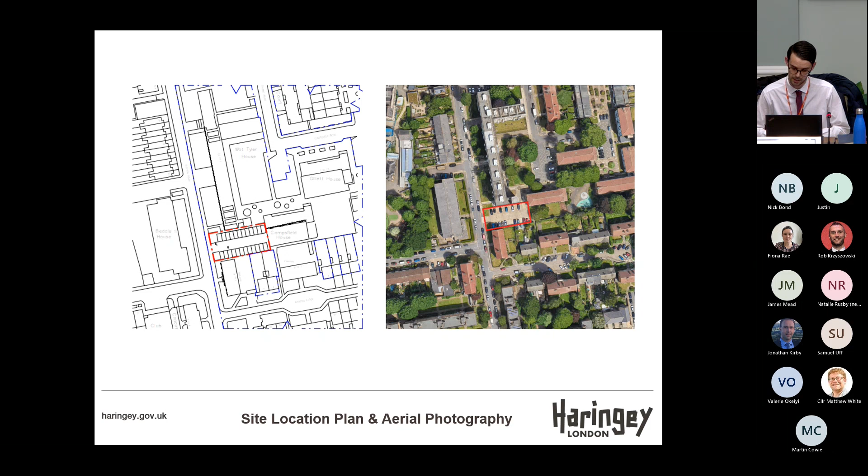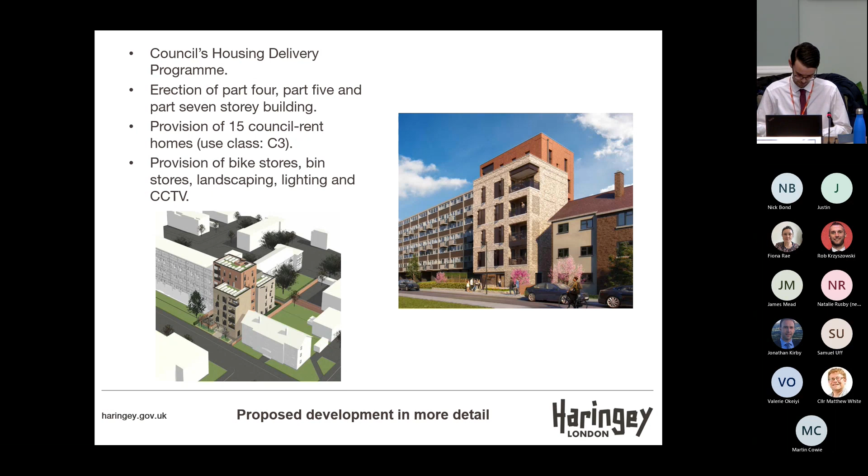The scheme also proposes off-site works on other parts of the estate, including new landscaping, new tree planting, improvement to existing play spaces, and provision of new lighting and CCTV. These works would mainly take place on the areas identified as B, C and D on the plan on the right-hand side.

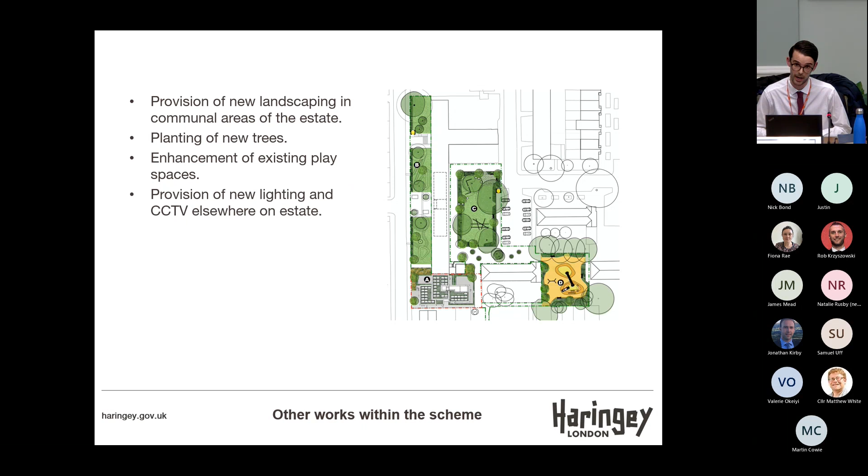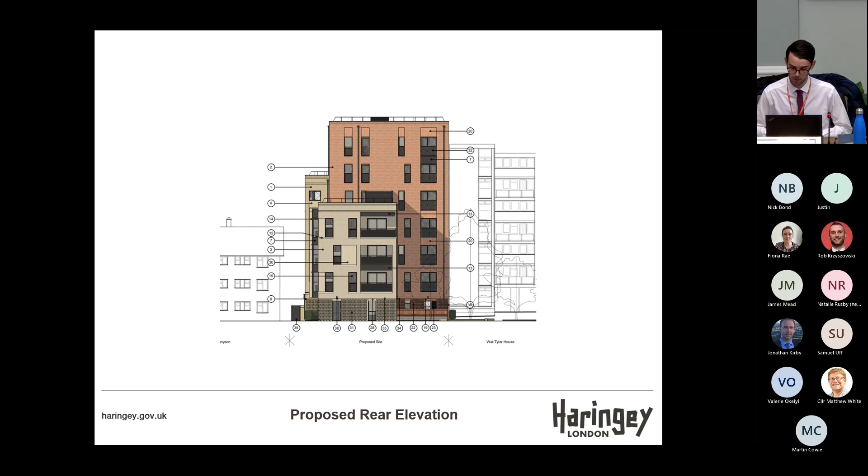These are 2 of the proposed floor plans. The image at the top is the proposed ground floor plan, which shows 2 dwellings provided at ground floor, one of which would be a wheelchair accessible dwelling. You can see there is a central staircase that provides access to the upper floors. The bike and bin stores are also provided at ground floor level, shown in purple on that image. The bottom image is a proposed floor plan showing how the dwellings are split up at upper floor levels.

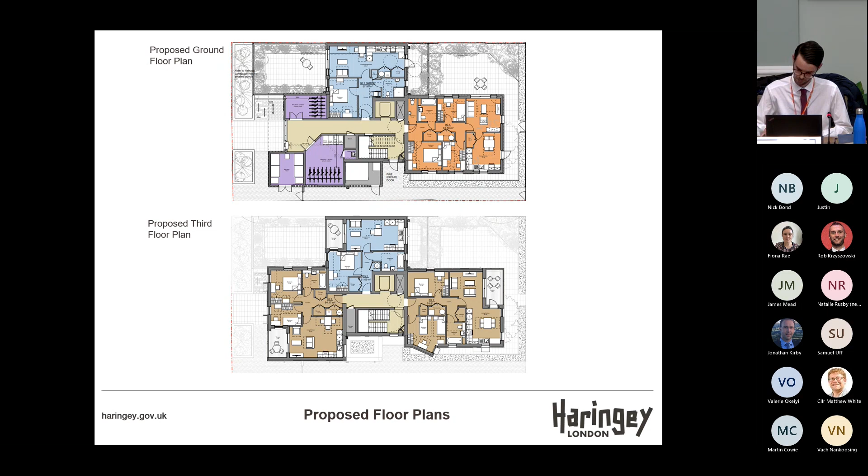Turning to the principle of development, the scheme would provide 15 homes contributing towards the council's housing targets. The scheme would be 100% affordable, addressing local need and need across London for affordable housing. The scheme would make effective use of a brownfield site in an established residential area where residential uses are supported in principle. Overall, officers support the principle of the scheme.

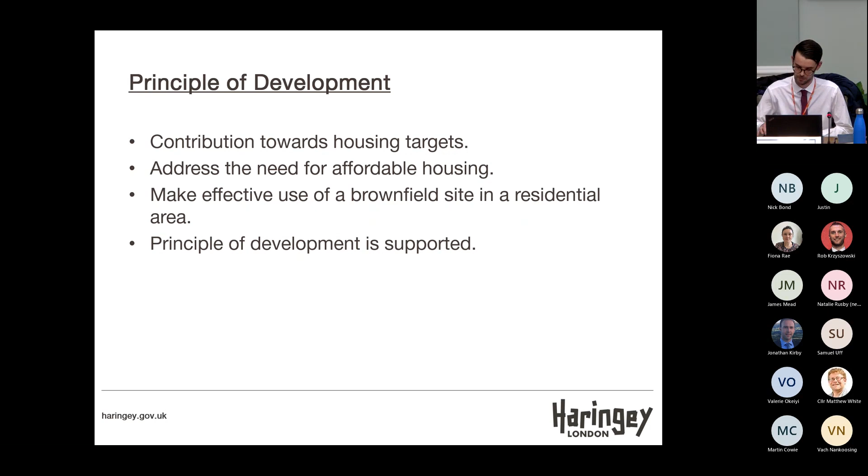The scheme has been through the council's pre-application process. The image on the left-hand side shows the initial pre-application proposal. The image in the centre shows the proposal that was presented to the Quality Review Panel. The response from the Quality Review Panel was broadly positive, however some design and detailing refinements were suggested by the QRP. The image on the right-hand side shows the final planning application proposal.

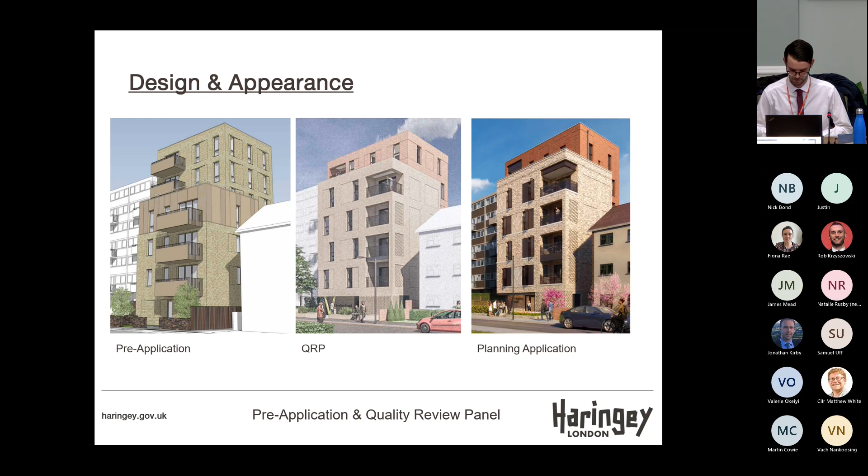The projection above Wat Tyler, however, is not significant, and the bulk of the building has been broken up by using different heights across it. Therefore, it's considered that the development sits well in relation to Wat Tyler and the wider area. The proportions of development are considered acceptable.

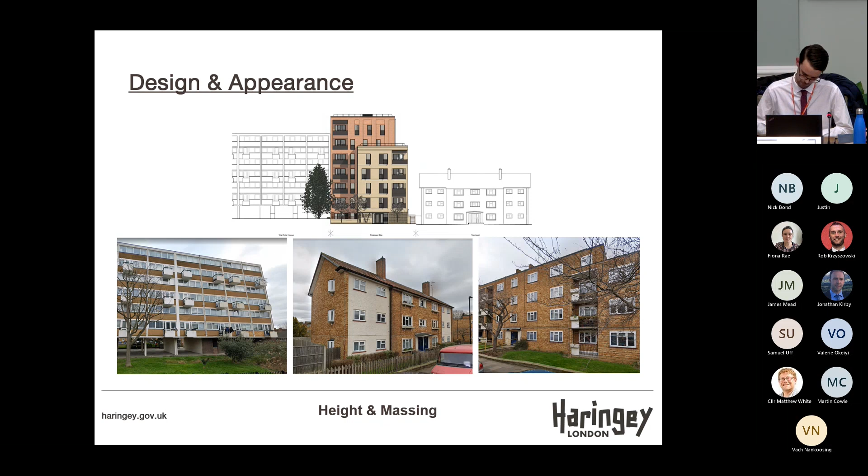The main material used for the proposed development is brickwork, and this is considered acceptable as this material is characteristic of the area. Three different types of brickwork are proposed across the development, with yellow stock to the front, red brick for the central block, and a lighter coloured brick to the rear. The use of three different bricks helps to break up the appearance of the development.

Metal windows and doors are proposed to be incorporated across the development, and these add a contemporary element to the scheme. At ground floor level, it's proposed to construct a wide recessed entrance, which gives a clear frontage to the building. Hit and miss brickwork is also proposed to the side of the entrance, providing a strong visual base to the building. These aspects ensure that the development appropriately addresses the street.

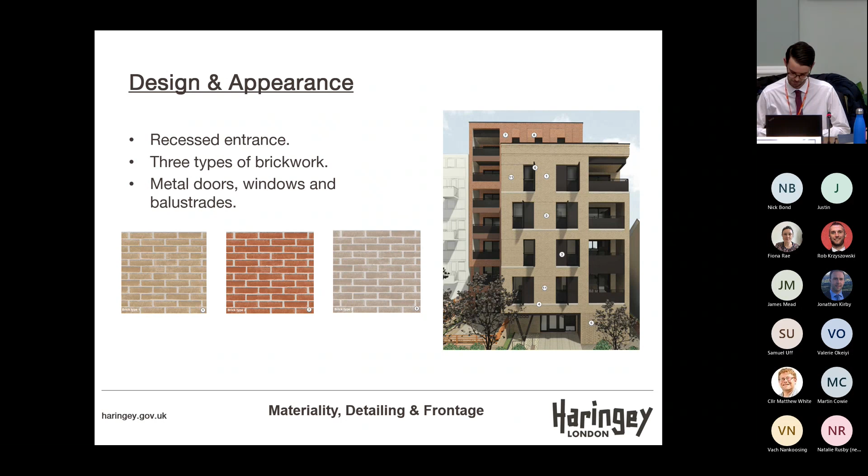The site is not within a conservation area. However, there are four conservation areas in the proximity of the site. To the west is the Campsbourne Cottage Conservation Area. To the north is the Alexandra Palace and Park Conservation Area. To the east is the Hornsey Waterworks Conservation Area. And to the south is the Hornsey High Street Conservation Area.

The top photo shows a view from the Campsbourne Cottage Conservation Area. From this view, the development would be viewed together with Wat Tyler House, so would not be overly dominant in this setting. The bottom photo shows a view from Alexandra Park. In this view, the development would blend into the backdrop of other buildings. The development would not be highly visible from the other two conservation areas. Overall, it's considered that the setting of the nearby conservation areas would be preserved.

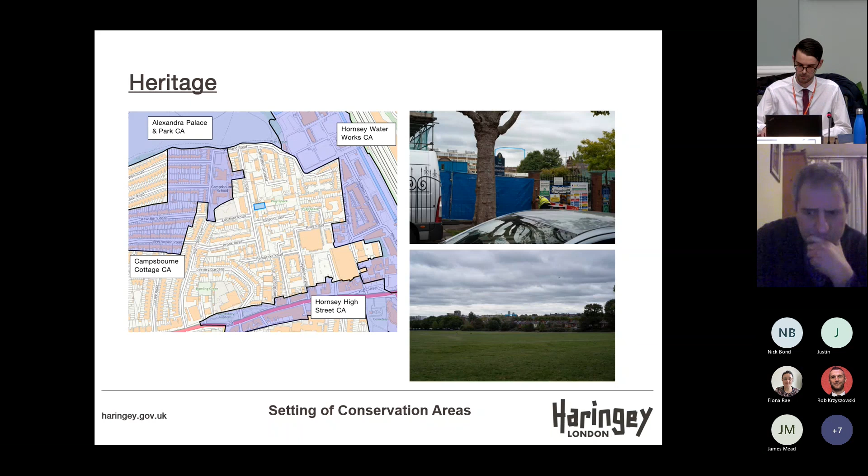In terms of neighbour amenity, Wat Tyler House is the building to the north of the site. The 7-storey element would be constructed close to the boundary with Wat Tyler House. However, this element would not project forward of the front wall of Wat Tyler House and would not project beyond the main rear wall of Wat Tyler House. The 4 and 5-storey elements would be set in from the boundary with Wat Tyler House. The overall siting would limit impacts on outlook and open aspects from this neighbouring building.

A daylight and sunlight report has been provided with this application, and this concludes that sunlight and overshadowing tests would be passed for Wat Tyler House, and the majority of windows would pass the daylight test. The scheme has been designed to ensure there would not be undue overlooking of Wat Tyler House.

To the south of the site is Tennyson House. The 5-storey element at the front would be constructed close to the boundary with Tennyson House, however would not project forward of the front wall of this neighbouring building. The other parts of the building would be set in from the boundary and would drop down to 4 storeys to the rear. These factors would ensure that there would not be undue impacts on outlook and open aspects.

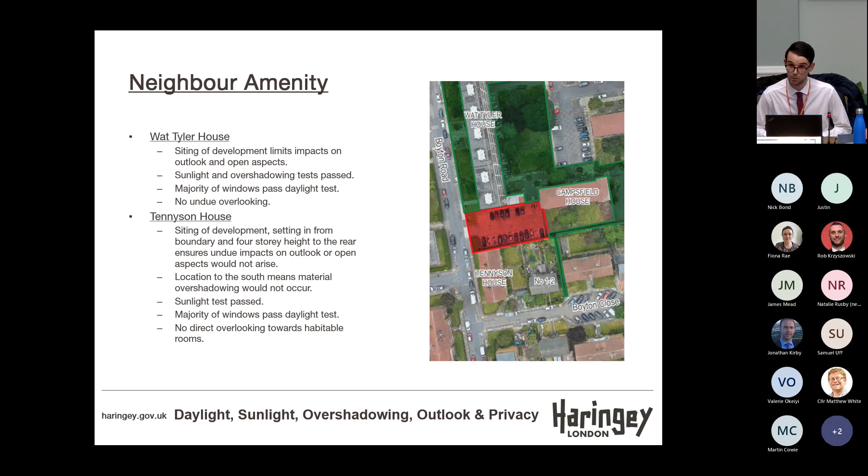The location of Tennyson House to the south means that material overshadowing would not occur, and the daylight and sunlight report has concluded that the sunlight test has been passed for Tennyson House, and the majority of windows at Tennyson House passed the daylight test. There would be no direct overlooking towards habitable rooms.

To the east of the site and to the rear is Campsfield House. The development would be suitably separated from Campsfield House to ensure there would not be undue impacts on outlook or open aspects. The daylight and sunlight tests have been passed for Campsfield House. There would not be any direct overlooking towards the windows and habitable rooms of Campsfield House.

To the southeast of the site is 1 and 2 Boyton Close and Fleming House. Again, the development would be suitably separated from these neighbours to ensure material impacts on outlook and open aspects would not occur. The location of these buildings to the southeast means that overshadowing and loss of sunlight would not be excessive. The majority of windows tested at these neighbouring properties pass the daylight test. The development would incorporate a number of southern-facing windows. However, the fitting of obscure glazing in these windows can ensure that overlooking would not be significant.

The scheme has been designed to comply with the London Plan space standards. All of the dwellings provided would have access to open space, outdoor spaces, with the ground floor units having access to garden areas and the upper floor units having access to balconies and terraces. All of the dwellings provided would be dual aspect.

There would be some non-compliance with the daylight and sunlight tests for the new units. However, this is mainly due to the provision of balconies above the new windows. If the balconies were removed, daylight and sunlight results would be significantly improved. Officers consider that the provision of outdoor spaces in the balconies is important. Therefore, the provision of these outdoor spaces is considered to outweigh any non-compliance with the daylight and sunlight tests. Therefore, acceptable living conditions and good quality accommodation would be provided.

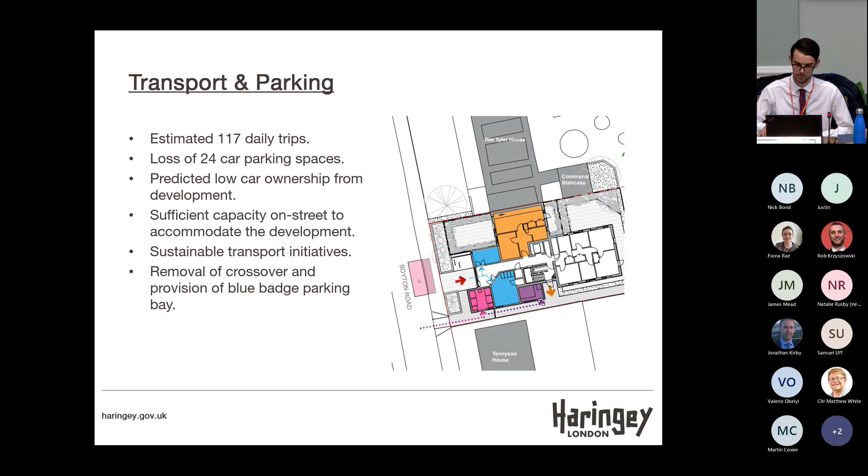In terms of sustainability and energy, the scheme would achieve a 76% reduction in carbon emissions, mainly through energy efficient measures and renewable technologies such as air source heat pumps and photovoltaic panels. A carbon offset contribution would be required, and the scheme would pass the overheating requirements.

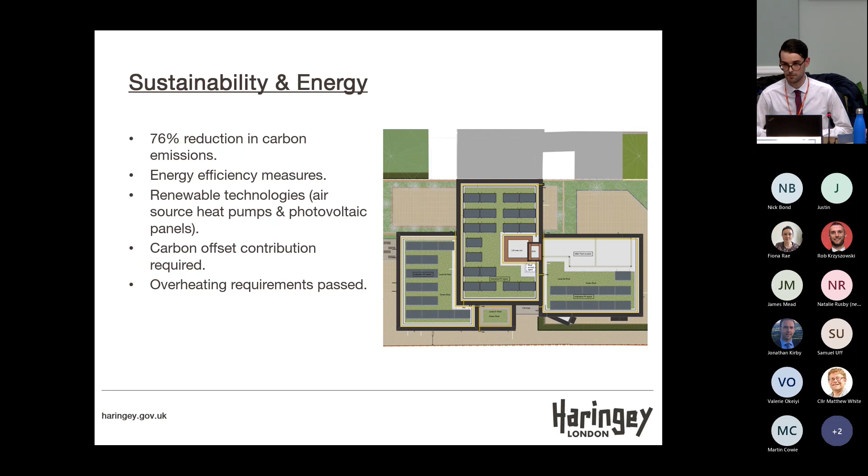As already mentioned, the scheme includes landscaping works on site and off site. Shrub and hedge planting is proposed on the areas labelled A, the site, area B, the area to the front of Wat Tyler House, area C, the communal garden area to the rear of Wat Tyler House, and area D, the play space adjacent to Campsfield House.

The planting of new trees is proposed across all these areas, with a net gain of 15 trees in total. The proposed development would incorporate green roofs, contributing to the greening of the area. Overall, the scheme would deliver an urban greening factor of 1.73 on this part of the estate, with a net gain in biodiversity.

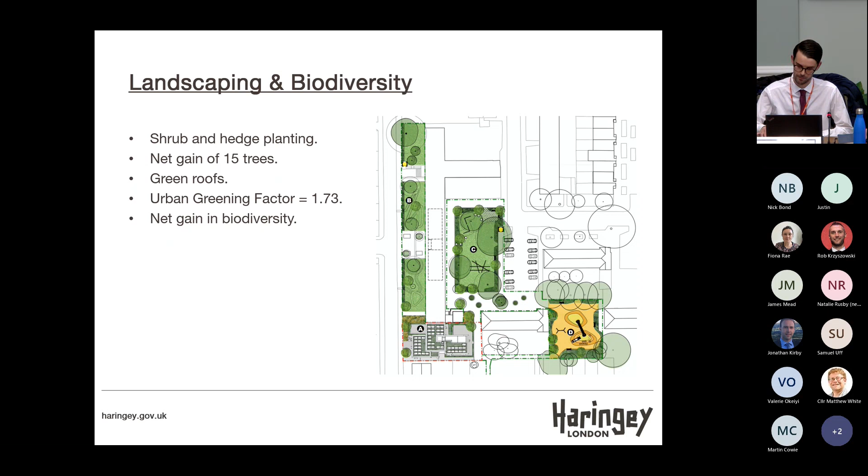The applicant has worked with the Designing Out Crime Officer, who has no objection to the scheme. The scheme includes a number of crime mitigation measures on-site and off-site, including new lighting, new CCTV and defensible boundaries. The scheme would also deliver increased passive surveillance, particularly over the alleyway to the rear and the garden areas to the rear.

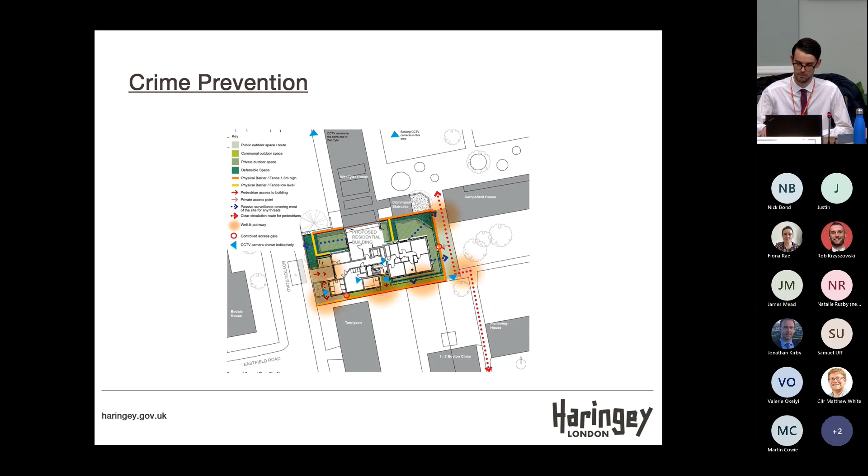In terms of fire safety, the proposed building would be greater than 18 metres in height and therefore would be a relevant building for fire safety purposes. This means that a fire statement is required.

A fire statement has been provided in support of this application, and this makes various recommendations on the construction of the building, the features required to reduce fire risk, and the means of escape and access for the fire service. These recommendations can be secured via a condition.

There has been a recent debate regarding the number of staircases required in taller buildings. The GLA has recently confirmed the position in London, and 2 staircases are required in buildings over 30 metres in height. This building is under 30 metres in height, and therefore 1 staircase is considered acceptable in this instance.

The comments from the Health and Safety Executive are noted. However, officers consider that ground floor escape routes are acceptable, and neither the fire brigade nor the council's building control have raised any concerns with the development. Therefore, the development is considered acceptable in respect of fire safety.

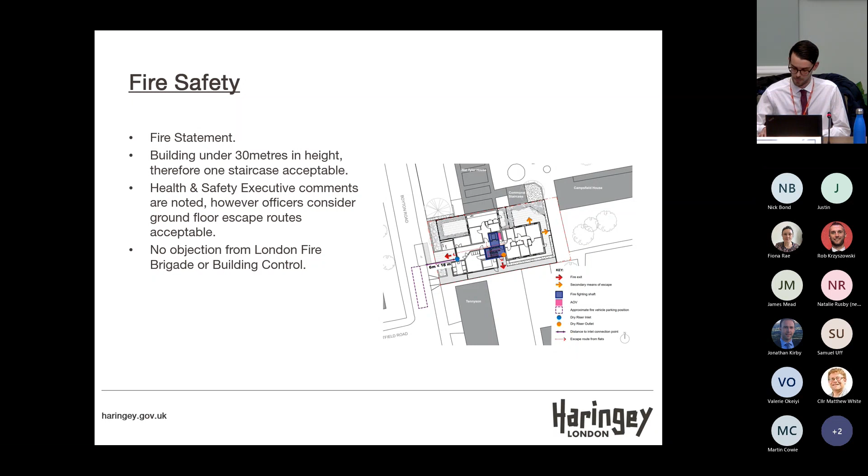To conclude on the scheme, the principle of development is supported by officers. Proposals would make efficient use of a brownfield site within an established residential area. The scheme would contribute to the council's housing targets and address the need for affordable housing. The housing mix is considered acceptable, having regard to the constraints of the site. The scheme would equate to a high quality design, which would greatly improve on the appearance of the site.

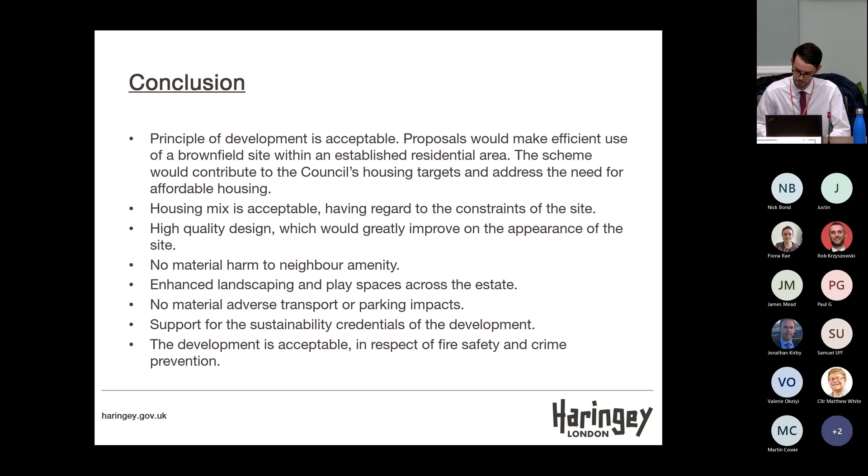There would be no material harm to neighbour amenity. The scheme also delivers enhanced landscaping and play spaces across the estate. There'd be no material adverse transport or parking impacts. Officers support the sustainability credentials of the development, and it is considered acceptable in respect to fire safety and crime prevention. Officers' recommendation is to grant planning permission subject to conditions and an agreement.

Thank you, James. So do the members have any clarification questions for the planning officer?

Councillor Ovac: thank you, Chair. Just two questions relating to transport. At paragraph 6.70, page 40, it states sustainable transport initiatives such as Car Club and Travel Plan are incorporated into the scheme and will be secured via condition, but I couldn't find this under the conditions. There was only mention of cycle storage at page 60, but no mention of the Car Club or Travel Plan under the conditions. Second, it's mentioned at page 17 that despite the proximity to these forms of public transport, the majority of the site has a public transport accessibility level of 1B, indicating very poor access to public transport. So just querying whether there will be any collaborative work between the council and TfL to ensure better transport accessibility, considering it is a car-free development. Thank you.

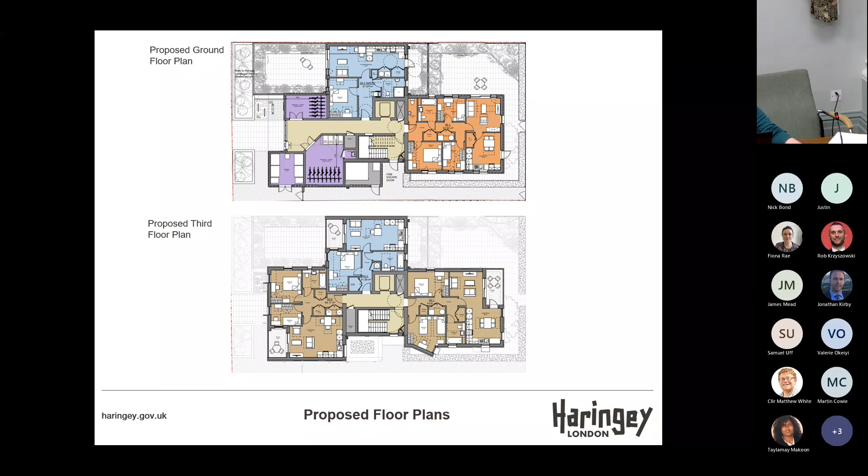Thank you very much. Of course, that wasn't covered on the speakers. I hope that doesn't matter. Thank you, Councillor White. Thanks, Chair.

Just on the 3 small bay windows in Tennyson House that's mentioned in 6.43 in the report. It says that these do not appear to be primary openings that provide notable outlook. Therefore, impacts on these bay windows would not materially affect the living conditions for those residents in Tennyson House. I'm just wondering how we know what those windows are actually used for by those residents.

So we don't know for certain. We don't, amazingly enough—even our housing colleagues don't have internal floor plans of all the council's housing stock. But we do know that those windows are less than 2 meters from the corner of the building. So unless their front room, which has a large window facing the street, is a very, very shallow room, then it must be a secondary window to that front room. So that front room has a large window facing the street and a small projecting bay window. It's quite close to the corner of the building anyway, so it'll still have some outlook, even with a building 2 meters away from it after this is built.

Councillor Buxton: Thank you, Chair. Just going back on the parking restrictions in that area, because I was under the impression that there was a consultation going on or had been completed about CPZ in the east of Hornsey. Has that concluded, or has that been factored into the plans?

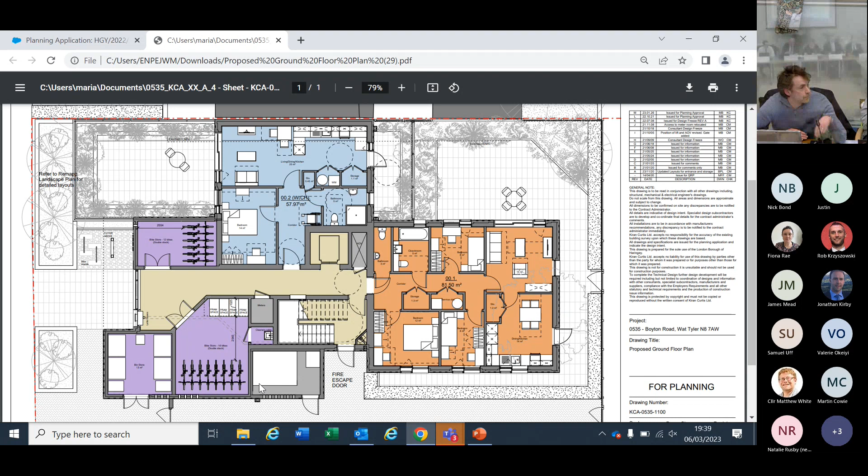So in the addendum where it says the HSE is not satisfied, that is still their latest position? Yes, we haven't been able to satisfy them, but in terms of what's safe, we're satisfied that the concern they raise isn't valid - there is a separate means of escape out, and it's separated from that cycling accommodation.

There is obviously building regs approval to go through afterwards. Building control have said that they're satisfied with it, and you could open the cycle door and access that externally, but that compromises the use of a bike store because people have to go further. So we feel it's an acceptable compromise to allow that access onto the shared lobby that helps people access their bikes better, while having two fire doors that we believe satisfy the concern.

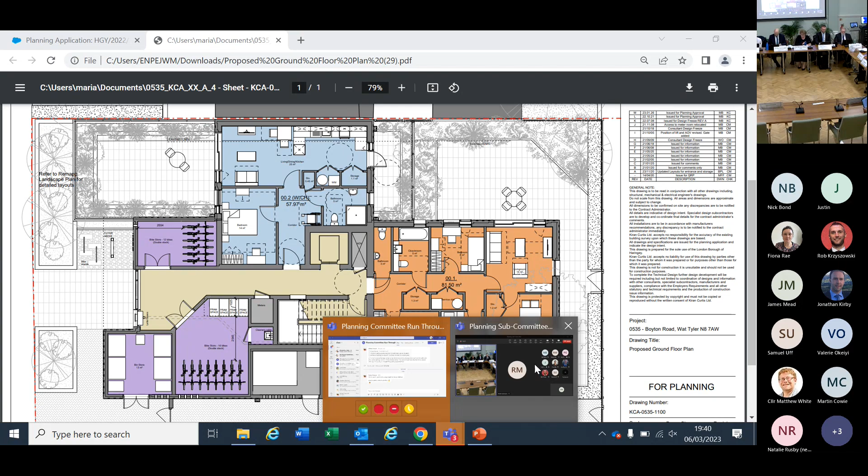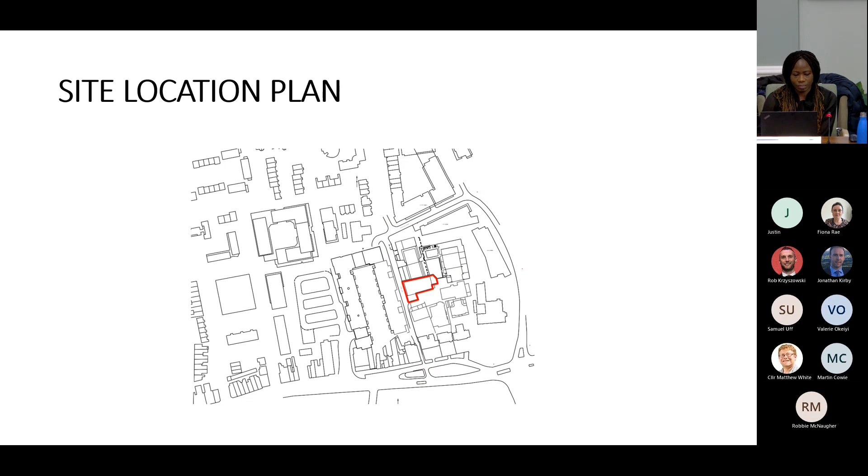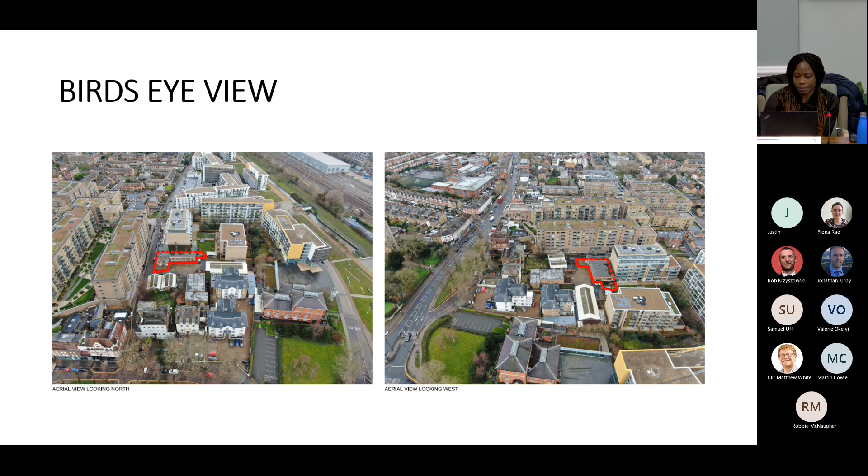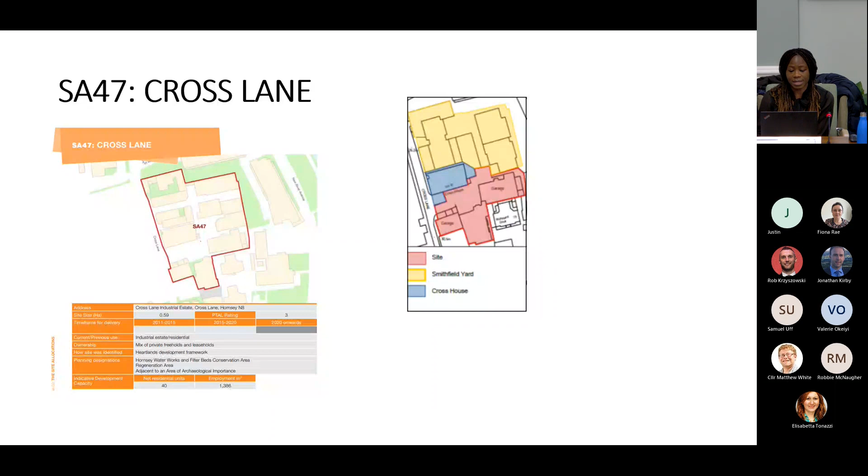The site forms part of site allocation SA47, which seeks employment-led mixed-use development with residential uses. To the right is the site allocation plan, which includes the Cross House site highlighted in blue, the final phase of this site allocation to come forward for development. Smithfield Yard, highlighted in yellow, was the first phase, and the Paul Motor site, highlighted in pink, was the second phase that recently received planning permission.

The site is a 2-story brick building with outdated internal facilities and the inability to adapt to changing commercial needs. This building fills the majority of the site and is currently occupied by Palm Recording Studios. There is currently an area for parking to the south.

The proposal is for a 6-story building, including basement level. 9 residential flats are proposed, comprising 2 one-bed, 5 two-bed and 2 three-bed flats, and 815 square metres of employment floor space, 6 car parking spaces for the commercial component, car-free for the residential component, 1 blue badge space, and commercial and residential cycle parking spaces, and private amenity and landscaping.

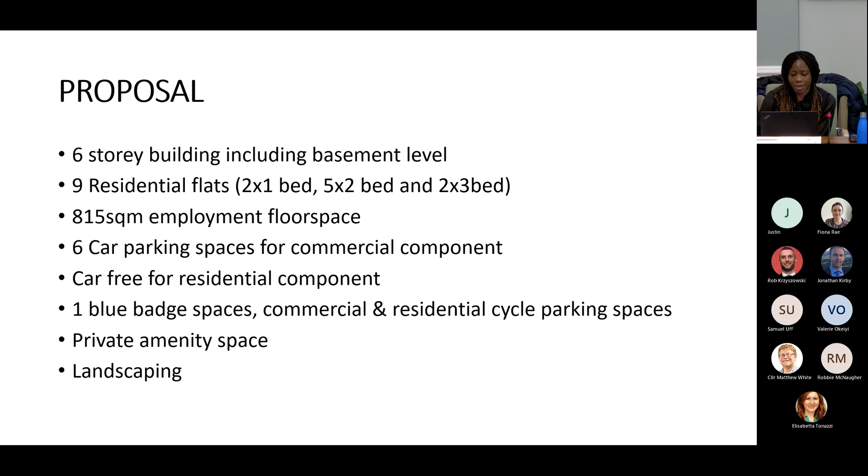The considerations include principle of the development, quality of accommodation, quality design, scale, heritage impact, landscaping, impact on amenity, transport, and sustainability.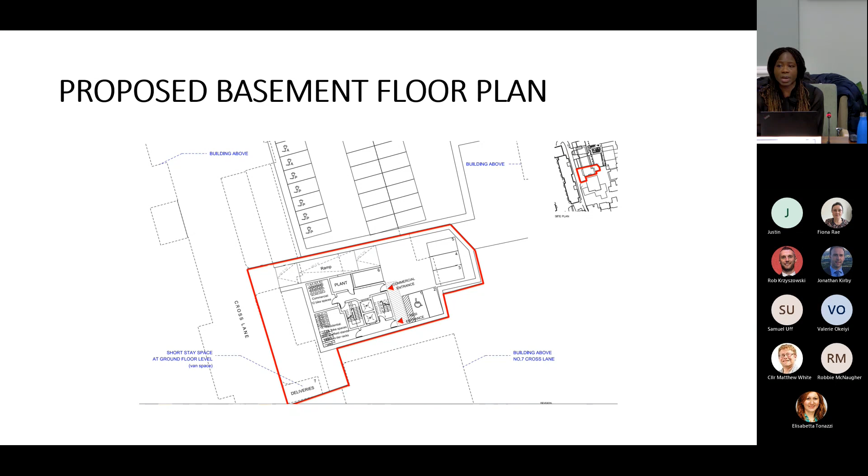Access to the commercial and residential units on the upper floor is via a lift and staircase, with separate bin stores located behind the designated delivery loading bay to the front. Visitor cycle parking for 4 bikes is located next to this bay.

Currently the existing building occupies the entire site. Stepping the building back from the curb edge of the frontage enables 3 trees to be planted and permeable paving. To the rear is a terrace with planters and a visual link with the central courtyard space of Smithfield Yard and the recent planning permission at the Paul Motos site.

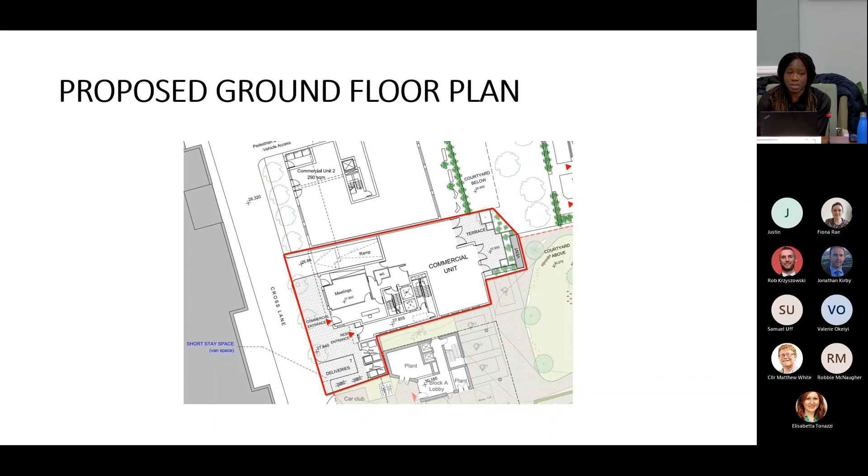I will now focus on one of the key issues. In terms of employment for the scheme, 815 square metres of commercial floor space over ground, first and second floor level is proposed, and there will be no net loss of employment floor space.

The existing tenants of the current building intend to use the newly created employment floor space as a recording studio, which is the current use. Marketing evidence demonstrates that there is currently a high demand for flexible commercial spaces to be used as offices, studios, and light industrial purposes in the area.

The employment floor space has been designed to attract a high level of interest from potential occupiers, in that the space has been designed to maximise the efficiency and usability of the space and is easily adapted to allow for more than one commercial unit.

The proposed employment floor space will support the same number of jobs whilst allowing the site area to be utilised more intensively. The replacement floor space will provide a valuable contribution to the employment floor space stock in the borough, and the scheme will result in local labour training initiatives.

This is a typical layout of the residential units. The residential units will be provided on the 3rd, 4th and 5th floor, and they're stacked as 3 units per floor. Each flat has private amenity space in the form of a balcony, and the flats are single aspect, either west or east facing, with no north facing single aspect units.

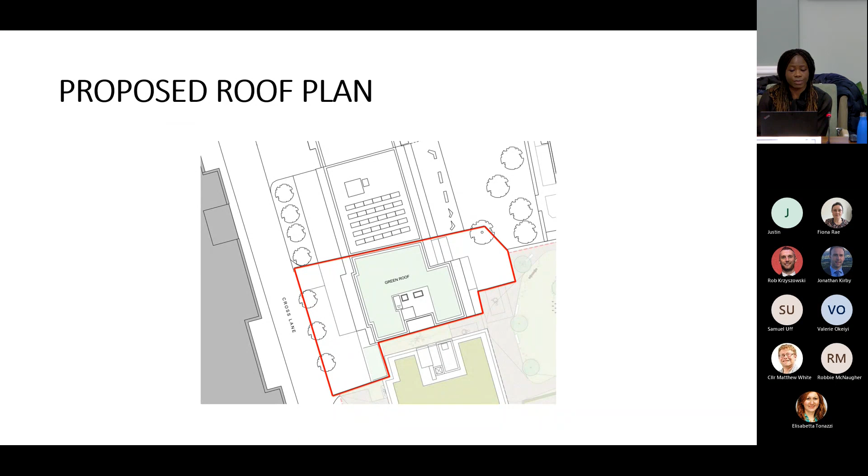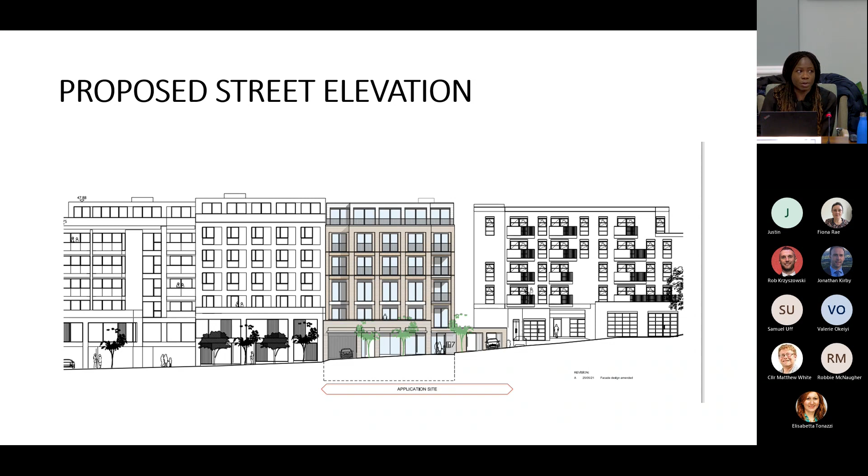The scheme has been through pre-application discussions with officers and the quality review panel on 1 occasion.

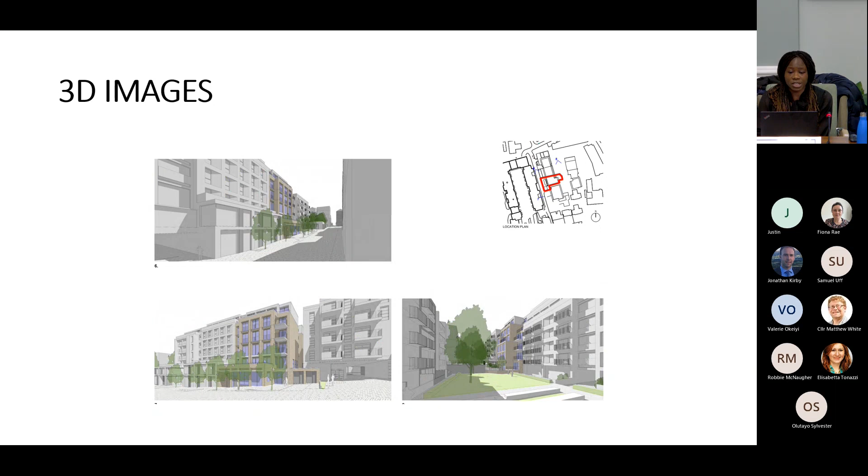In terms of the heritage impact, the scheme has been through significant conservation and design advice, which has been rigorous, and the scheme has been tested in a number of views requested by officers. The proposed development would preserve the character and appearance of the conservation area and would respect the setting of the nearby listed buildings. The proposal would enhance the quality of the conservation area along Cross Lane.

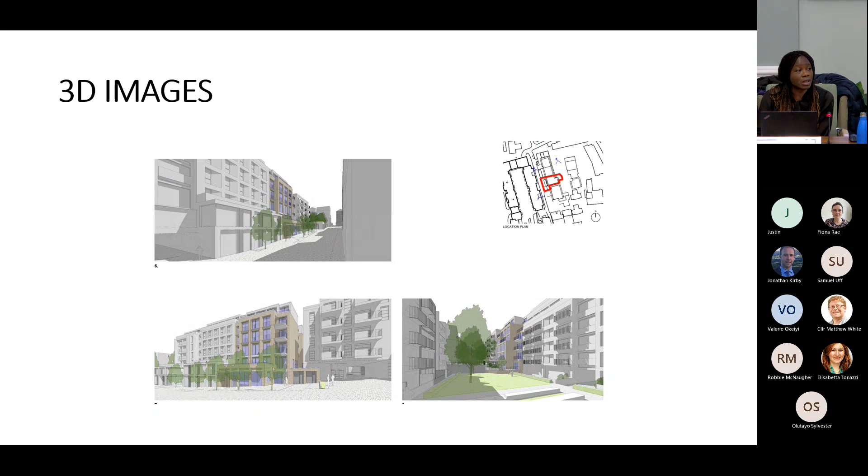And in terms of impact on amenity, there would be no material impact on amenity of nearby residents in regard of loss of outlook or privacy, and no significant detrimental impact on the amenity of nearby residents in regards to daylight and sunlight.

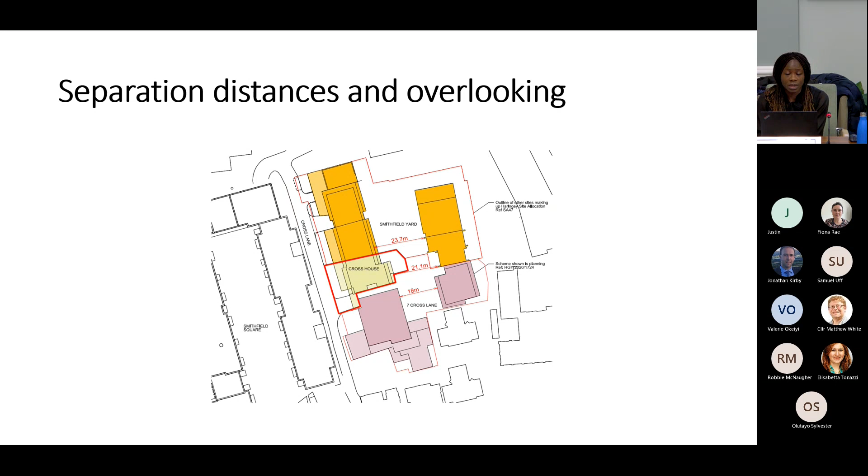And in terms of transport and parking, the PTAL is 3 medium and the site is in close proximity to PTAL 5, which is very good. The scheme is a car-free development for the residential component, and 6 car parking spaces, including 1 blue badge space, is proposed for the commercial component, and 29 cycle parking spaces are proposed overall for the residential and commercial component, which also includes 4 visitor cycle parking spaces and a dedicated loading bay at the front forecourt.

This is the Section 106 heads of terms. Officers recommend the committee resolve to grant planning permission subject to conditions and planning obligations as set out in the committee report. Thank you, Chair.

Thank you, Valerie. So do members have any clarification questions to the planning officer? Councillor White. Thank you, Chair.

Yeah, just a couple of questions. First of all, on the matter of aspect, I was a little confused by a couple of things in the papers. In paragraph 6.5.3, at the top of page 161, it says the flats which are single aspect are either east or west facing single aspect or dual aspect, which doesn't seem to make sense to me. I don't know if I'm missing something. Then on the following page in 6.5.11, it says the majority of units will benefit from either dual aspect or an east or west facing single aspect. But I gathered from what you said that they were all single aspect. So could you just clarify that? I've got another question following that, but maybe I'll let you answer that first.

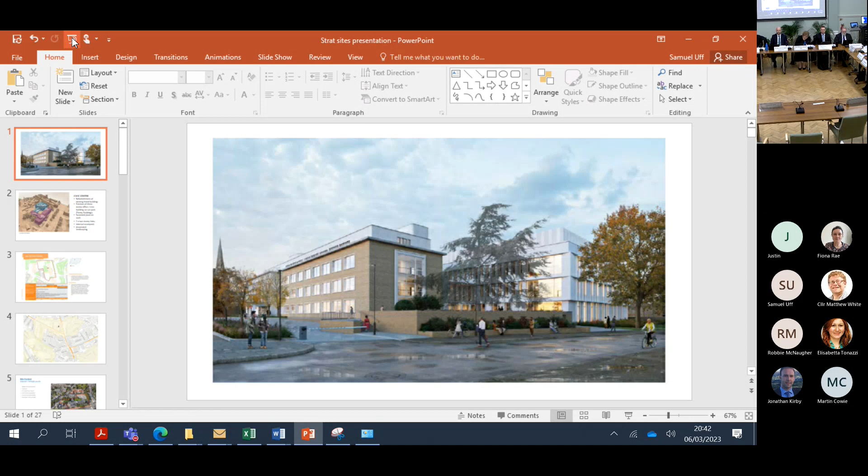Right, okay, so we're going to move on quickly. So item 10 are the pre-application briefings, and we're now on to item 11, which is the pre-application, the Civic Centre, High Road, N22 8LE, that's pages 247 to 272. The proposal is set out in our pack.

Planning officer is Samuel Uff, and I'll pass over to Samuel to present this item. Thank you. Oh, sorry, thanks very much. Thanks, Chair. This proposal is for the refurbishment and renovations to the existing Civic Centre and erection of a 3-storey building in the rear car park. The use would retain the existing civic uses and an expanded contemporary council office function.

The existing building was statutorily listed as Grade 2 in 2018. The site is within the Trinity Gardens Conservation Area and is designated as site allocation SA5 in the Site Allocations DPD, and WGSA1 of the draft Wood Green Area Action Plan. These policy documents both predate the 2018 statutory listing of the Civic Centre. Both highlight the suitability of redeveloping the car park alongside renovations to the Civic Centre and the proposed uses that are put forward.

The scheme has been subject to numerous pre-application meetings and has had two well-received discussions with the QRP. A development management forum was held on the 20th of February, and the notes of these meetings are set out in the pre-app reports. Officers are generally supportive of the design, scale and massing of the proposed building. The repairs and renovations to the existing listed building are broadly supported as a means of retaining the civic use of the site and creating suitable contemporary office layouts. Members' feedback is sought at this stage to inform the submission of the detailed plan application in the coming weeks.

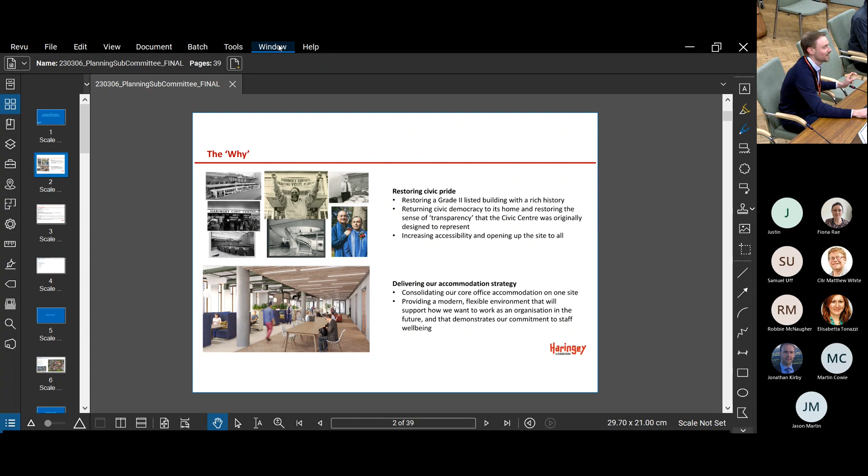In January last year, Cabinet approved a business case for the scheme that we are presenting to you this evening. I won't go into the detail of that business case here, but I wanted to pull out two key drivers for why the scheme is so important for us.

The Civic Centre has a long and rich history, and we are really keen that it sees even more history. So bringing back that sense of civic pride, bringing the Civic Centre back to being the heart of civic democracy in the borough is really important for us, as is bringing back that sense of transparency, in every sense of the word, that the original design of the building had. We're really keen to increase accessibility and open up as much of the site as possible to the wider public.

It's also key to delivering our accommodation strategy. The scheme will enable us to consolidate our core office accommodation onto a single site and provide modern, flexible workspace for our workforce, which supports how we want to work in the future and also demonstrates our commitment to staff wellbeing.

We've done a series of engagement prior to this point, away from the formal planning process. We've engaged with key local stakeholders, including the two nearest primary schools, the local church and the Traveller site. The schools in particular are really excited by the scheme and the opportunity to get involved, and we're also talking to them about being involved in some co-design elements around some of the external spaces, which Jason will cover later in the presentation.

We've done two public engagement events at Wood Green, one at Wood Green Library and one at Trinity Primary School, open to all residents, the results of which will be included as part of our formal application. We've also engaged with staff and had a series of staff roadshows where they've been able to input into the designs in terms of what they'd like to see in terms of amenity. Finally, we also have a member forum, a cross-party forum that allows that group to see the design progress and input on key design areas, particularly around the civic use of the building.

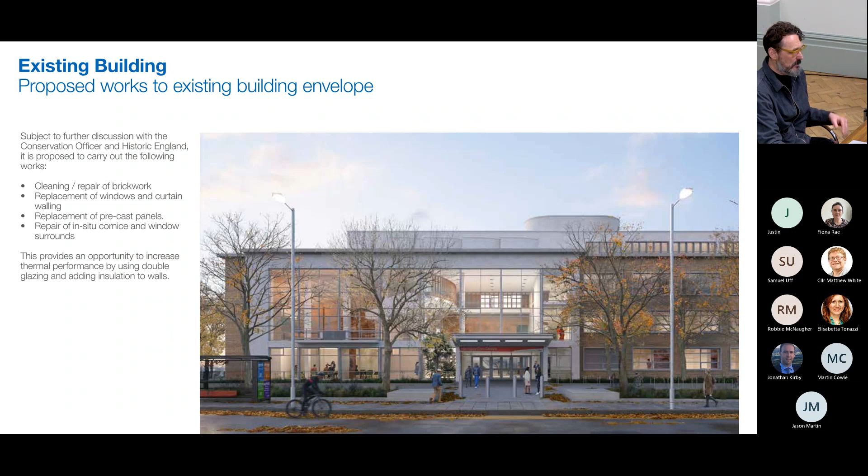And then we are proposing to replace the precast panels with a GRC element, which is lighter weight and allows insulation. I'm going to talk now about the Trinity Road building, which is the working title for the annex building. In terms of the design principles, there are some existing mature trees on Trinity Road. We want to keep those.

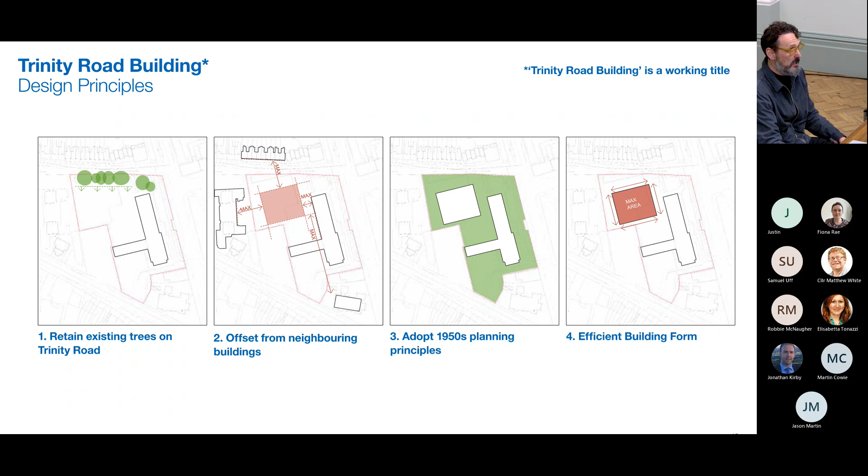So the new building is located in a compact plan form at the centre of the car park site. That maximises distance to neighbours. We've adopted 1950s planning principles, which is a building in a park, in keeping with the existing building. The other advantage of this compact form is it's very efficient in terms of its proportion of external envelope to internal space, which is great for energy saving.

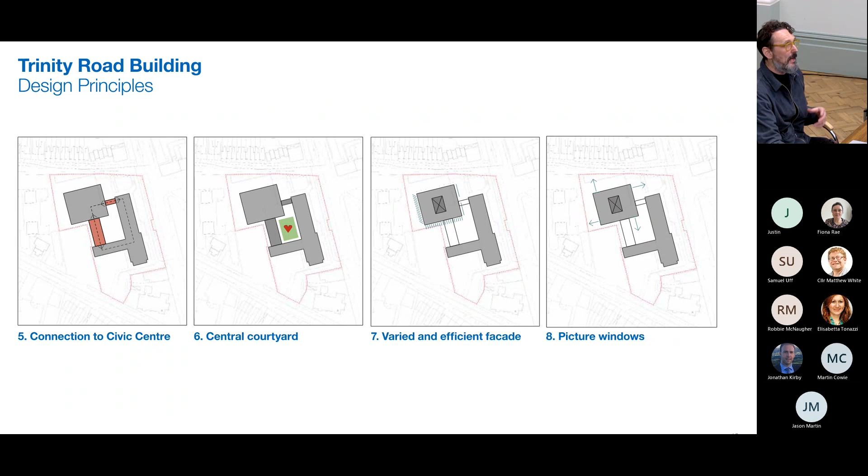We've got some connections to the Civic Centre, which I'll talk about a bit more, but that creates a central courtyard. And then in terms of the facade, we're looking at a brise soleil, which varies according to its orientation, and some picture windows. More of that later. So in terms of its massing, it's a 3-storey office building.

It has a single additional storey of plant space, which is set back from the parapet. There's a 2-storey link block to the west, and then a bridge connecting the north wing of the Civic Centre to the new building at first floor.

One of the key aspects of the design is essentially wrapping the building with solar shading, fins and horizontal bands which shade the windows and reduce the energy consumption of the building.

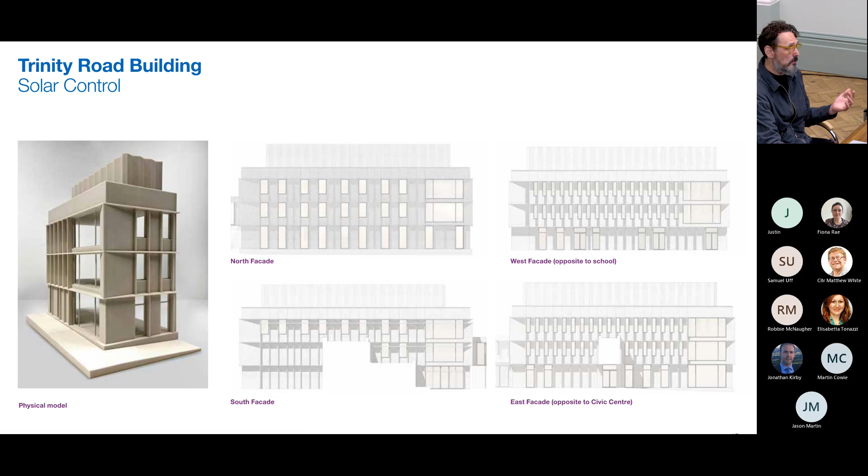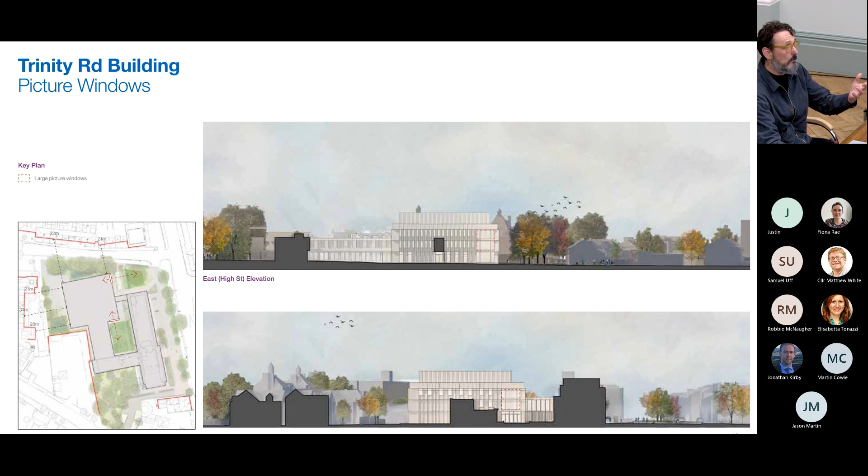At each of the 4 corners, we've got larger picture windows to allow views into the building, but also views out to the surrounding areas. They're on all 4 corners of the building, including one looking towards Alexandra Palace to the west.

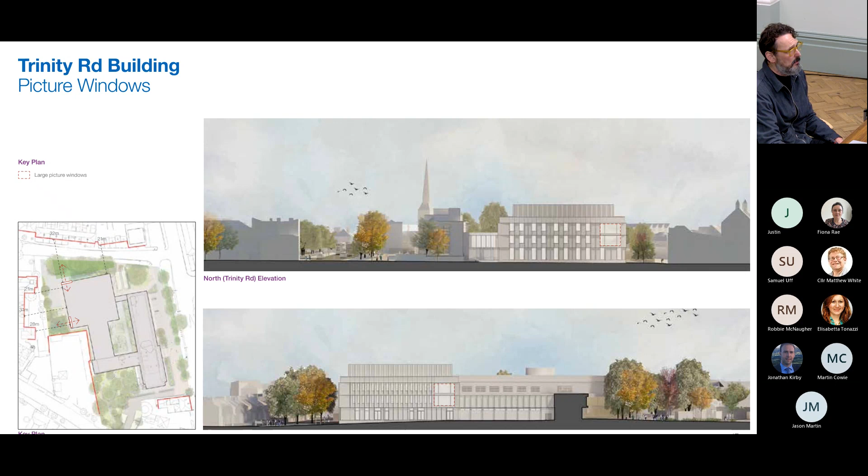And you can see in this image the proposal to create the central courtyard, the 2 link blocks going into the annex design.

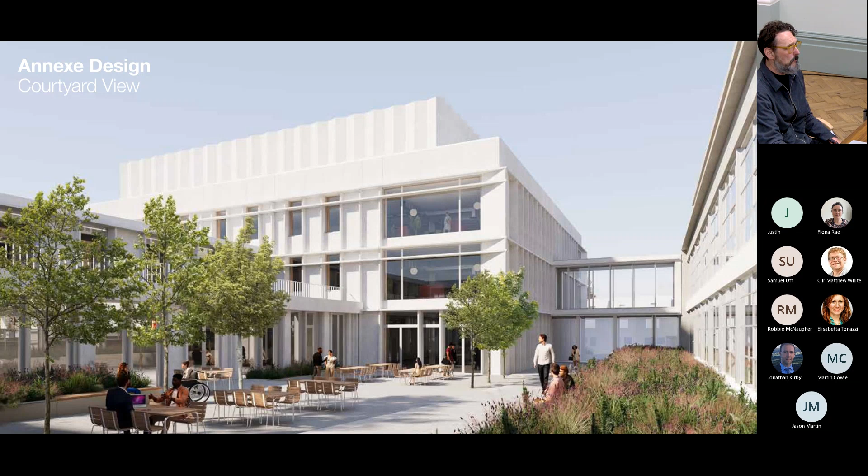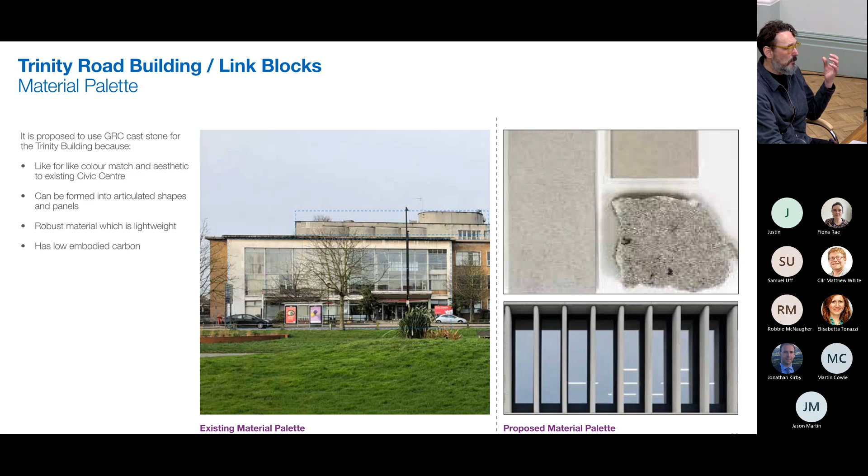In terms of material palette, both for the replacement of the precast panels and the new building, we're looking to use GRC, which replicates that original precast material. It's a stone-like material. You can get it in a variety of colours and textures, but it's very thin, which means that it can be lightweight and it's lower energy in construction.

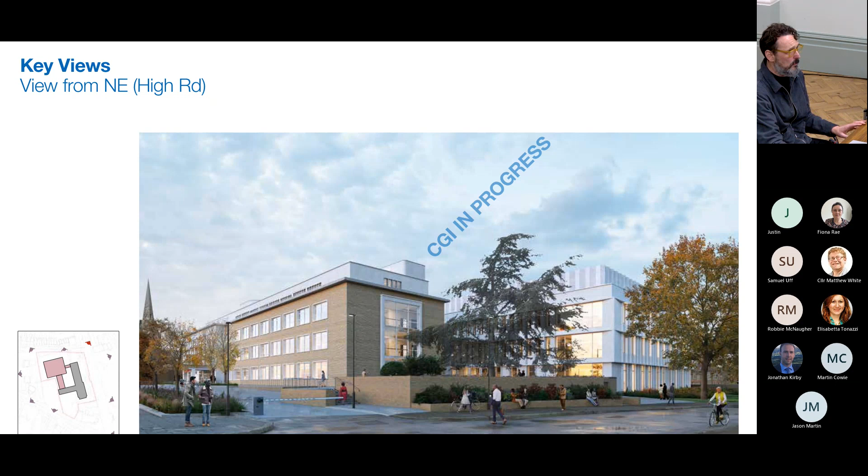And then we've got some CGIs. You've seen this one already. This is the view from the northeast, from the high road. And then this is a closer up view looking at the link block, the connection to the north wing with the gate underneath it.

There's a fence underneath the link block, which creates that sort of privacy for the internal courtyard. Bike storage in this vicinity is under development.

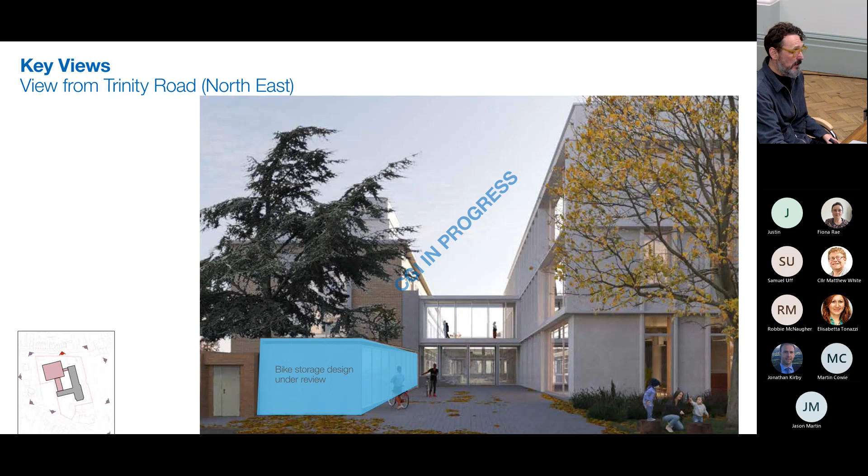Just waiting for the slide to catch up. So I'm going to give you a tour of the building now very quickly. Oops.

We'll be looking in the council chamber to sort of bring it back up to modern standards, but respecting the existing finishes which are there.

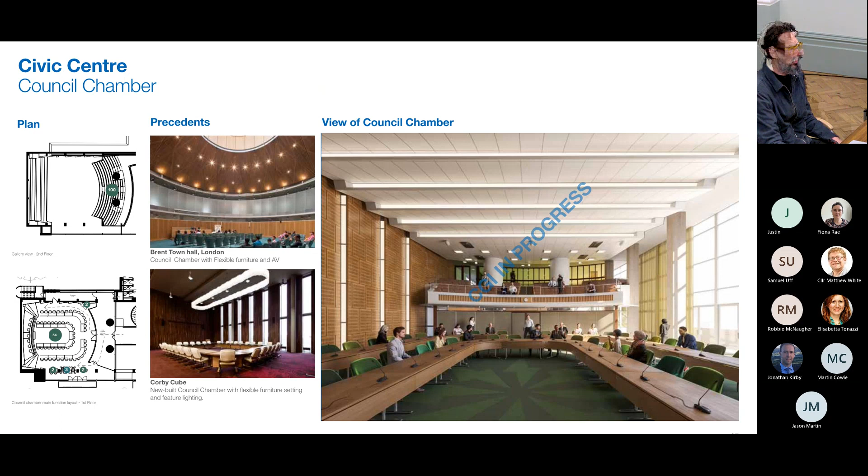Committee rooms, a similar story, and the mayor's suite. And then the shared space, the old registrar space. All of these CGIs are in progress to a degree. We're working through the interior finishes, but this space gives the opportunity for something to be shared with the community, and it will break out to one of the external spaces I'm about to talk about.

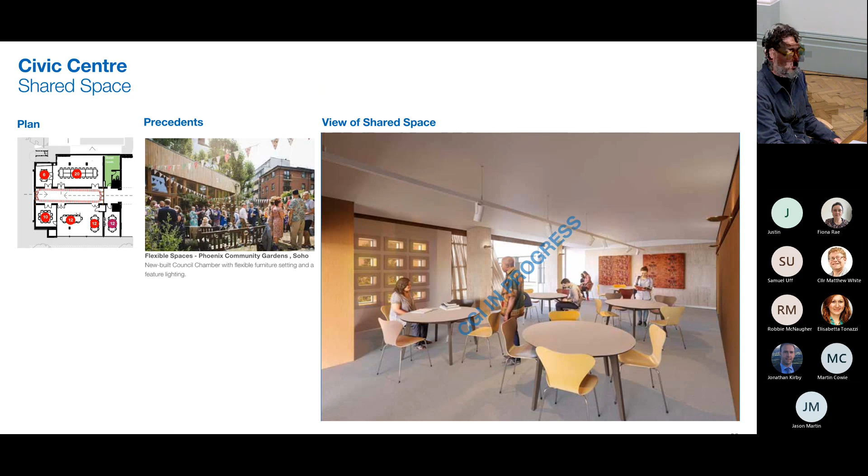So the north wing of the office is one area where we're doing more significant change to the interior of the building.

As you're probably aware, it's a largely cellular space at the moment, so lots of partitions and a central corridor. The proposal is to remove those partitions generally and just retain a few of the higher quality office spaces, but create an open plan environment. Now that is subject to some ongoing discussions with the conservation design officer, in terms of trying to retain a memory of that central corridor.

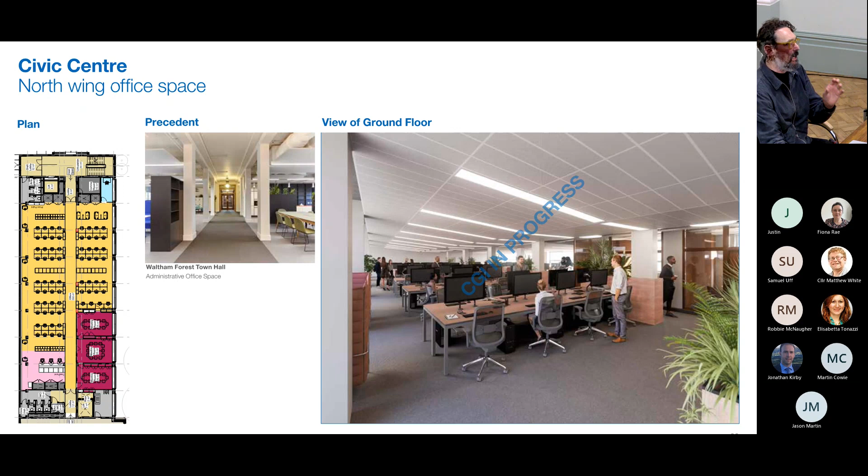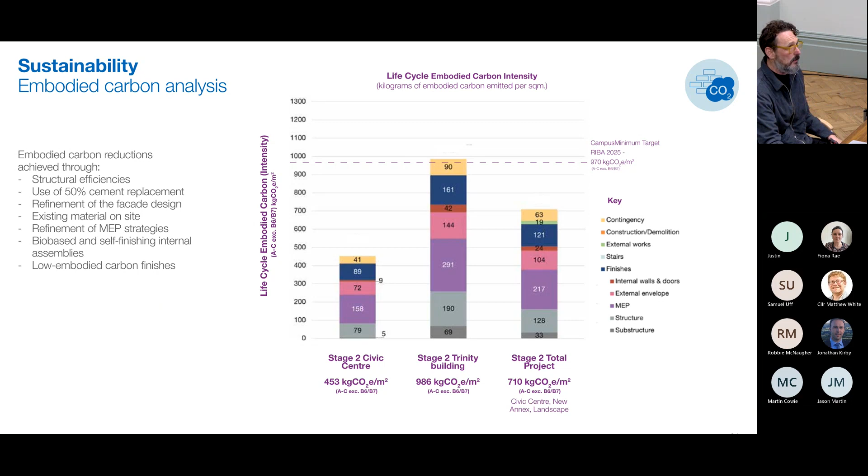At stage 2, we were very slightly above for the Trinity building. We're working on that. We're just updating those figures for stage 3. We believe we're going to bring it down marginally so that the new building will also achieve that. But the good news is overall, the project seen as a whole is substantially below the target.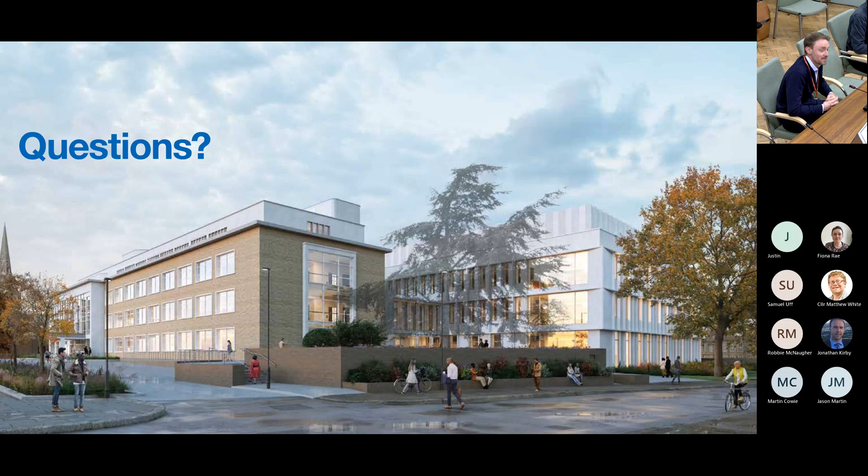The welcome area that sits immediately behind the reception - I don't know if we can bring up the picture very quickly - will be sort of an informal seating area. In theory, there's no reason why someone can't come off the street and access that area. Clearly, we would need to work with FM and security colleagues about how we want to manage that space. But primarily in terms of readily available public amenity, it's the outside area, particularly that woodland area, which we're looking to bring back into sort of full public use.

Thanks. So I suppose I'd just like to say that sounds a little bit like it's a bit of a missed opportunity, because that's certainly whenever I've been asked my opinion, I've always said, including when I was a member of cabinet a couple of years ago - I said I was hoping that where we would get to was a kind of, we would have uses. People would be able to go there maybe to have a coffee or have a meal, or there are certainly examples elsewhere in the world or elsewhere in history where you've had civic uses and theatre or concert halls.

Or something like that. I'm not suggesting that we've got space there for those uses, but if we really want to be transparent and we really want to be accessible, then the place where the council does its business not only needs to be transparent, but also we need to be mingling with people while we're doing that business as much as we can. Of course, I understand that security is important, but I just feel like it's a bit of a missed opportunity to have those mixed uses. So I'm happy to come back to that one more time.

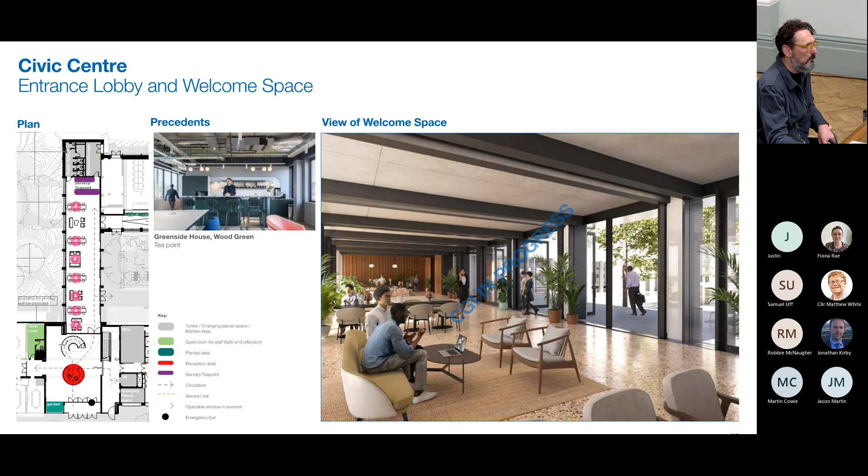But what we would say is that the area immediately outside the main entrance of the building, and the area immediately outside the old registrar and the council chamber above, is pedestrianised. And that is its appearance, and it's going to be improved dramatically. I agree with you, at the moment the box junction immediately outside is not a good feature, and that's something we're looking to remove.

And the square footage? So it is 6,000 square meters NIA, and 11,000 gross external area. Of that 6,000 square meters, I don't know off the top of my head exactly what the proportional split is between the administrative space and the other. I'd have to get back to you on that.

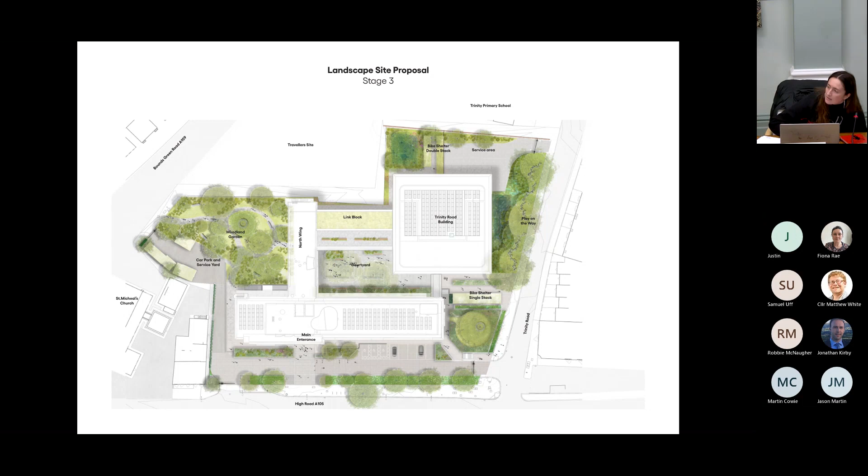Okay, Councillor Warren, thank you. Just a point from the quality review panel's report from their January response about the east-west pedestrian and cycle route—they weren't convinced it would be well used. Could you clarify if that's something you've responded to or expanded on since, and what's the plan to make sure it's well used?

Yes, we have taken steps. That's the left-hand side of this plan. We've made provision to improve the pedestrian route on the right-hand side past the southern end of the building, and where it connects into the woodland garden area we've improved that connection, and there will be a clear path running through. You can't see it on this plan, but there is a clear path running through and out onto Bounds Green Road. So yes, we have picked up on that.

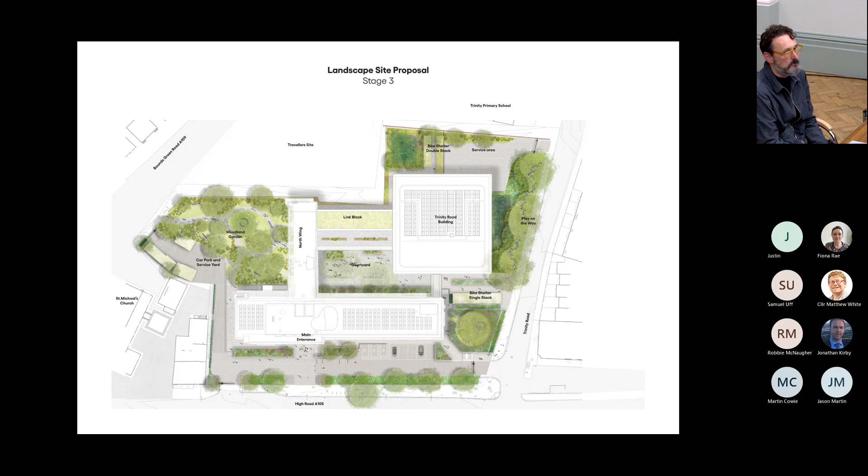Okay, right, so I think that's all the questions and comments. Thank you very much. Thank you for the presentation.

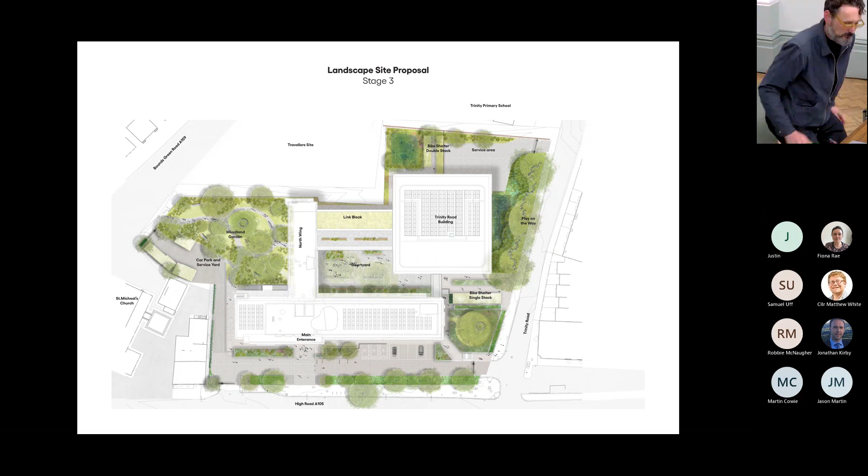Okay, so we're now on to item 12, which is update on major proposals, pages 273 to 288. This is to note. Any questions to Robbie McNaughter, Councillor Levy?

There were a lot of questions in my mind, but if I just keep it to four—I mean, whether you want to answer them now. The police station in Hornsey, what on earth is going on with that? Because that's been ongoing for ages. The Omega Works, the application's been classed as invalid—so what happened there? And Arundel and Baldwin Court, that's been going on for ages, and so has Osborne Grove. So I'm just wondering about those four issues.

Okay, thank you. Hornsey Police Station—there have just been some issues brought up by consultees, such as transport, that we're working through at the moment, and the viability report has been out to assessment. So those sorts of matters are being considered before a recommendation is finalised.